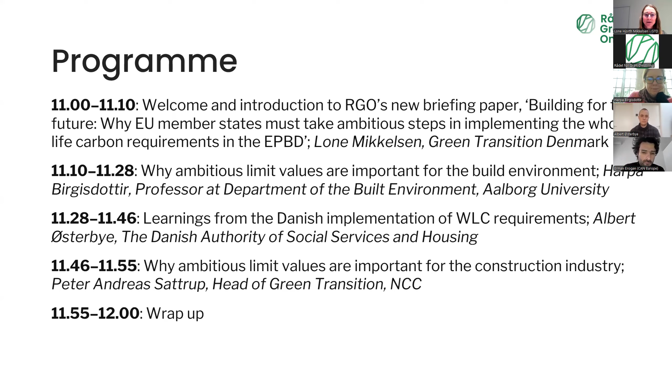As most probably know, the building sector in the EU is responsible for a very high amount of EU's total CO2 emissions, around 36%. Today we started talking about this whole life carbon expression, where early on we talked about the operational carbon, which is used when the building is in use. But since we expect these carbon emissions to decrease through efficiency improvements, the embedded carbon becomes more and more important to also include in the calculations for carbon emissions.

So now this whole life carbon has been introduced, and several member states have already introduced regulations nationally. From May last year, it was also incorporated in the revised EPBD in the EU. But it's very important to note that only the full potential will be realized through ambitious national implementation in the EU member states.

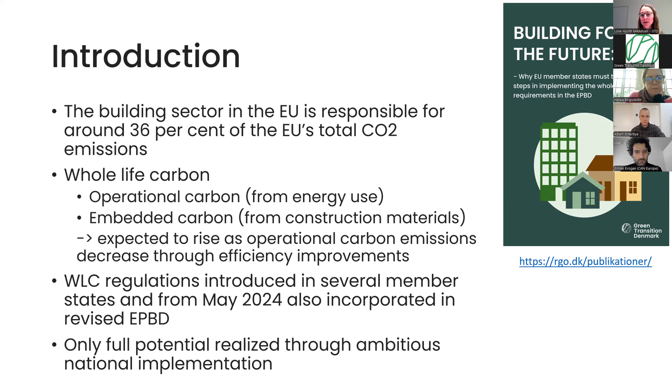In Denmark, and I'm sure this will be put in more words by both Harpa and Albert, in May 2020, Denmark introduced a test phase for a voluntary sustainability class. This came after a lot of calculations and data collection had been done, maybe especially at Aalborg University with Harpa involved in this work. So a lot of knowledge was already ready. In this phase, developers tested the sustainability requirements on specific new constructions, renovations, and transformations.

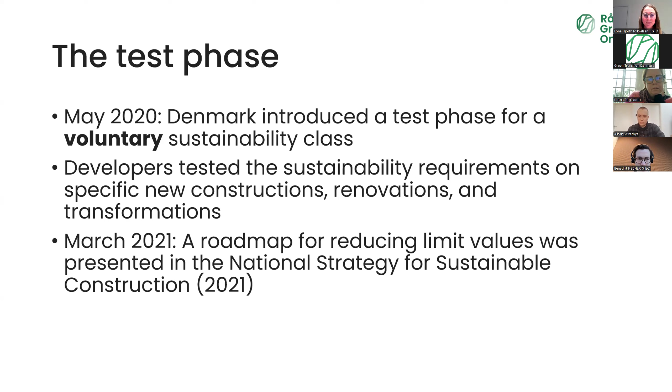When this roadmap was presented, it was also agreed politically that every second year these numbers should be revised, or the strategy should be reviewed.

Already in 2024 there was a revision, and at the same time there was a mobilization in the construction industry, because they found the limit values too unambitious. One argument was that an average new building in Denmark emits 9.5 kilograms CO2 per square meter per year, while the current limit value introduced was 12 kilograms CO2 per square meter per year.

As seen in the previous slide, for 2025 the next limit value was 10.5 kilograms, actually higher than the average new building in Denmark. So more than 630 stakeholders from the Danish building and construction sector signed up for more ambitious limit values, backing a call to lower the limit values to 5.8 kilograms CO2 per square meter per year in 2025. This number was taken from the reduction roadmap 2.0, which pointed to the Paris Agreement.

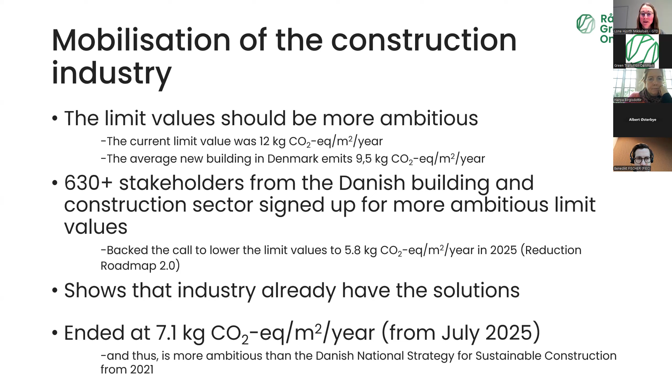This mobilization really shows that the industry already has so many of the solutions. In the end, there was agreement on a limit value of 7.1 kilograms CO2 per square meter per year, which will be incorporated in July 2025. This is more ambitious than the national strategy for sustainable construction from 2021.

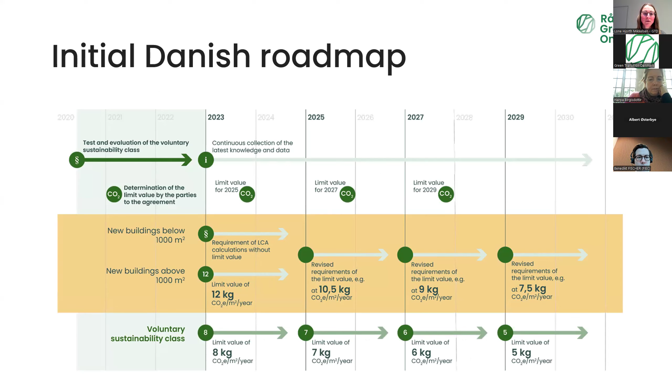And it's actually also very close - if you see the lower line, it's very close to the limit value of 7 kilograms CO2 for the voluntary sustainability class.

So we have some overall recommendations for an ambitious implementation in member states. Data is a crucial factor, and I'm sure Harpa will put more words to this.

It's important to initiate the uptake of the national roadmap immediately and not wait for the deadlines. Several member states have shown this is actually possible. Also, it's a good idea to include a voluntary sustainability class, which can introduce a carrot for developers to choose more ambitious paths.

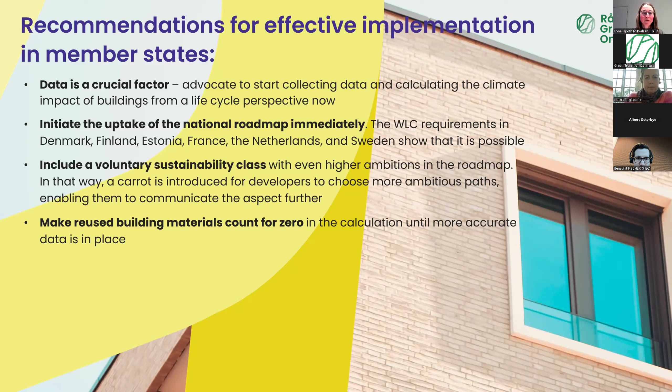And also, it's important to make reused building materials and recycled building materials count for zero in the calculations, so it is also preferable to use these materials.

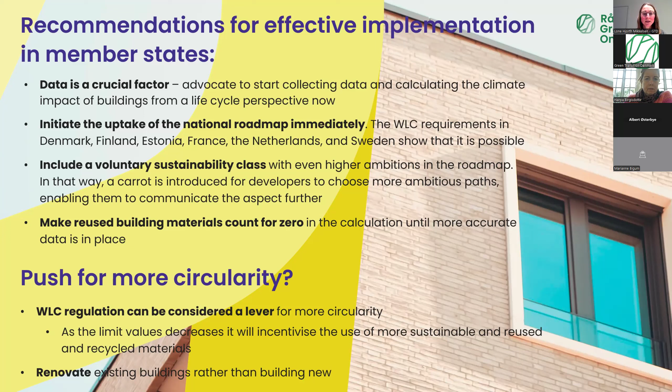And also the whole life carbon regulation can be considered a lever for more circularity, as when these limit values decrease over years, it will incentivise the use of more sustainable and reused and recycled materials. And then also overall, we should renovate existing buildings rather than building new ones.

So with this short introduction, I will give the word to Harpa Birgisdottir, who will tell us why ambitious limit values are important for the built environment. Harpa, please go ahead.

We all know that we have an urgent environmental challenge, and that regards climate. It regards more broadly our total environment. We know about the urgent climate challenge, and this has been told to us for many, many years in report after report from the IPCC, giving us ideas about the different scenarios we are looking into regarding the climate challenge.

And all this is, of course, about having to limit our release of greenhouse gas emissions, and we see different scenarios for our future depending on how well we do this. I know we all know this, but I just want to set the scene.

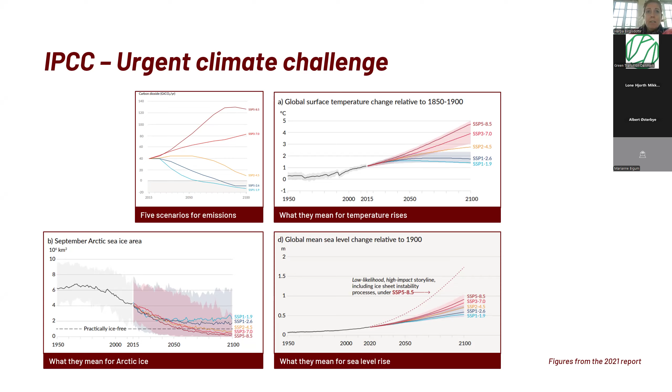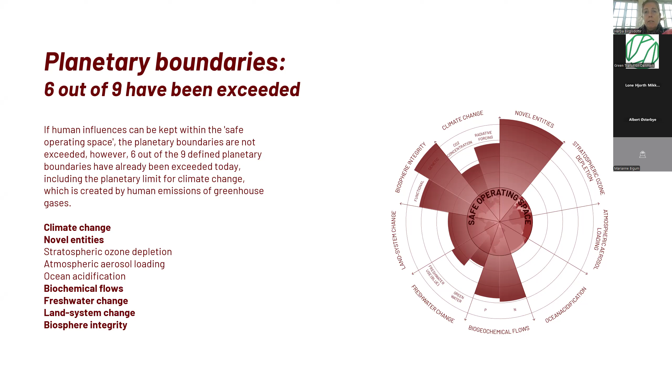We also have more than only greenhouse gas emissions to look into. Here we often work with the planetary boundaries and look at that. We have to keep our emissions and our impacts on planet Earth within a safe operating space. The situation now is that 6 out of 9 boundaries are exceeded, and many of them are very much far exceeded.

In terms of resources, there are different ways of looking into this, but one is the measurement of Earth Overshoot Day. That tells us a little bit about how our use of resources is exceeding our annual share if we wanted to have a sustainable use of resources. In Denmark, the Earth Overshoot Day was last year on March 16th, 12 days earlier than the year before.

So there is no doubt about the urgency, and therefore why we need to look into ambitious limit values when it comes to buildings. Now I'm going to talk a little bit about what we have been doing in Denmark. In Denmark, we are among one of the few countries that already now has limit values on the greenhouse gas emissions from new construction.

And as was told earlier, there was a push for much more ambitious levels. But as I will also show you a little bit later, although we believe and see that we have set some legislation that is challenging to work with, it is still not enough in order to meet, for example, the Paris Agreement.

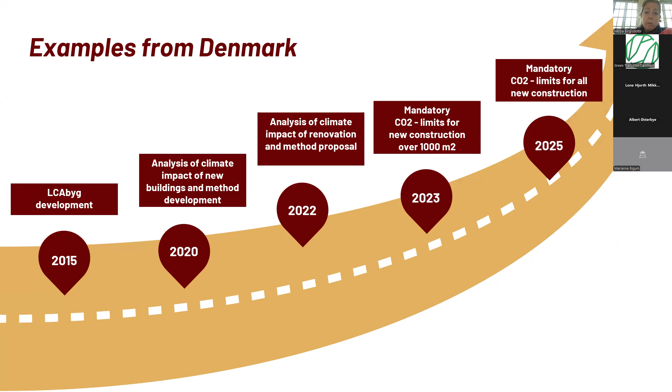We have been focusing a lot on gathering knowledge on the climate impacts of buildings. This started earlier, but we have this report from 2020, also translated to English in 2021, where we made this study of whole life carbon assessment of 60 new constructions at this time.

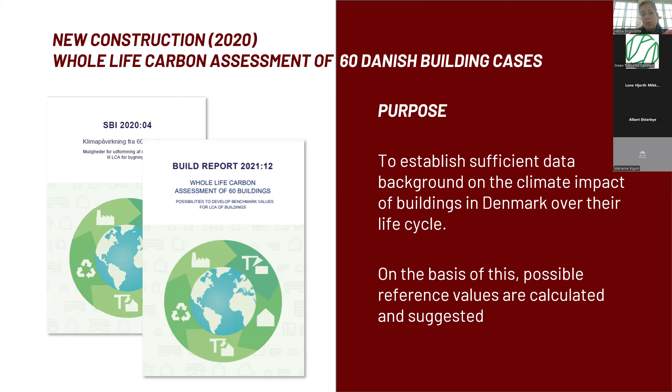The purpose of this study was to establish sufficient data background on climate impact of buildings in Denmark over the life cycle, with the purpose of being possible to develop reference values or limit values later on, because the limit values then came with the strategy that Lone just described earlier.

Just to very quickly recap, I'm sure most of you are familiar that we have the life cycle of buildings, divided into phases and modules. In our starting point in Denmark, we have simplified a bit, so we don't cover all modules according to the standard EN 15978, but we are increasingly including more phases and modules.

So here, starting in the study that we worked on with the 60 cases, we have a simplified scope of the modules included, but covering the whole life cycle. And we are calculating for a 50 year reference study period for the buildings.

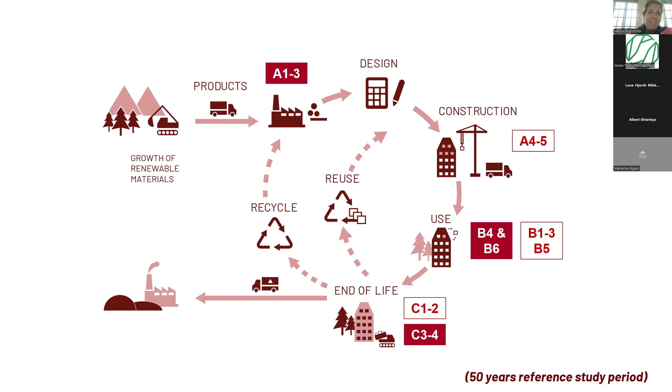So if we look at the 60 cases we calculated some years ago, these are different kinds of buildings, and in the report you will see all the details. When you calculate this for 50 years and sum it up into kilograms CO2 per square meter per year, we can see that the results of those cases ranged from a little bit above 6 kilograms CO2 per square meter per year up to about 14.

What we also saw here was that with the data and assumptions we have in Denmark, around 25% of the emissions over the 50 years were coming from operational energy in the buildings, and 75% from embodied carbon. That is due to the transition to more use of renewable energy in our energy grid in Denmark.

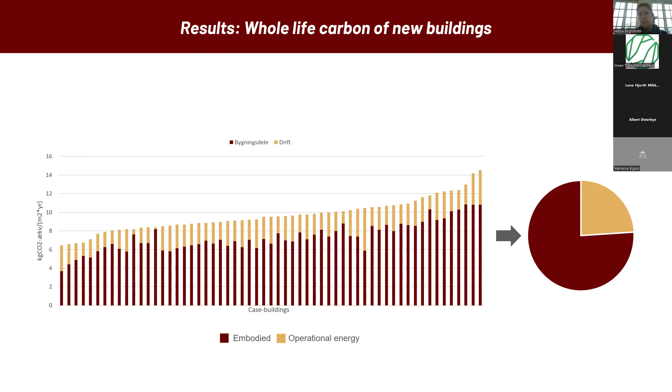And from that, I'm sure Albert will tell more about that, from the National Strategy for Sustainable Construction, a limit value was set of 12 kilograms CO2 per square meter per year, and the voluntary one of 8, which was also mentioned earlier.

But here it was based on the fact that around 10% of the cases we calculated could not fulfill the limit value. Of course, at that time there was not much knowledge about how to do LCA for buildings and so on. So we have to know that we have an urgency and we need to decrease, but we also need to make sure that the building sector now knows how to work with this.

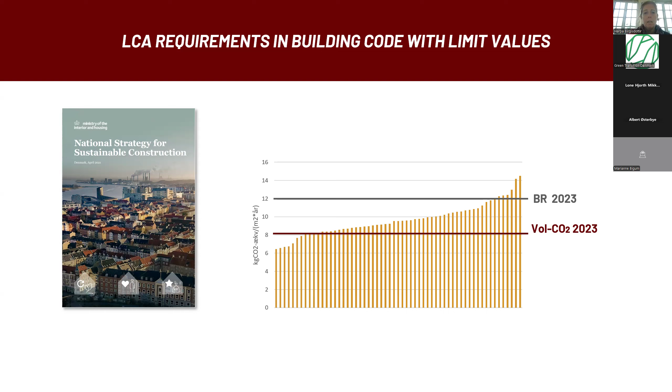In our research institute, we have made a lot of different studies on the possibilities to reduce the climate impacts of buildings. I'm not going to mention many, but I'll mention one study we had, which was the housing construction from 4 to 1 planet.

That was trying to reduce our emissions from using resources, like going from 4 planet Earths available to 1, simplifying a bit, like going from around 10 kilograms CO2 per square meter a year to 2.5. Is that possible? At that time we thought, okay, that is far from what we can do.

But again, just quickly to the results. In this report, available in English, the gray ones are the conventional cases, and the green-blue ones are the 24 cases we looked into in this study. Here we could see examples of residential buildings built in Denmark with much lower climate impacts.

The median of our standard cases is around 10.8, while the median value of the best practice cases was 6.2. You can see examples of some cases that are around 3 and 4 kilograms CO2 per year, clearly showing that it is possible to build differently.

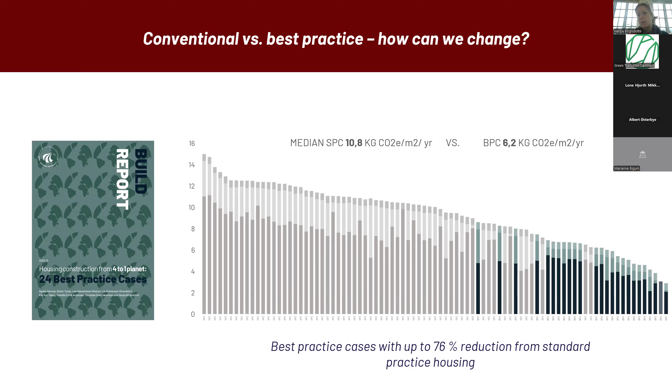As was mentioned earlier, going back to the limit values we have in Denmark, our task has been to conduct analysis and provide results that can be used to set the limit value. We did the 60 cases to prepare for the first limit value in 2023, and then we started another study to prepare for the limit value of 2025.

This report is only available in Danish, but there is an English summary in it, and we have some research papers related to this. Here we have gathered much more data than we had earlier when we started with the 60 cases, and now we have a little bit less than 300 cases available.

You can see a huge range here from the best practice of a little bit less than 3 kilograms CO2 per square meter per year. But you can also see many cases up to, in some cases, much higher emissions, higher than 12 kilograms CO2 per square meter per year.

That is because we also had tasks to study buildings with specific requirements that really need more materials or more strength, like hospitals, laboratories, and so on.

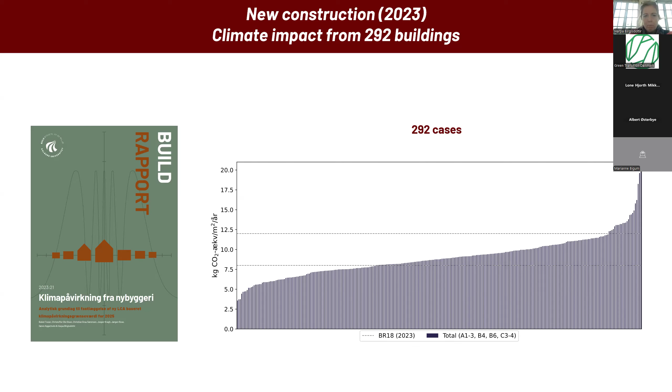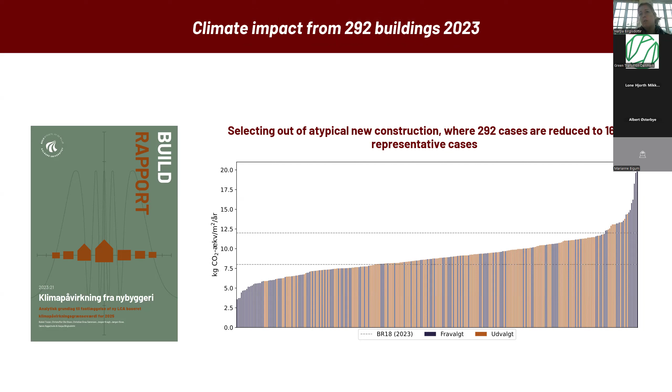So this sample of 300 cases covers both best practice, normal practice, and buildings with special needs. But our task was to select the typical new construction in Denmark, and that is why we are sorting out from our cases — the orange ones are the ones we have chosen as representative for climate impacts in Denmark.

Here we have the results, like I showed you earlier, now from 60 to 163 cases, but still a range from 6 to around 14 kilograms CO2 per square meter per year. So the range is the same, although we have many new cases and new data.

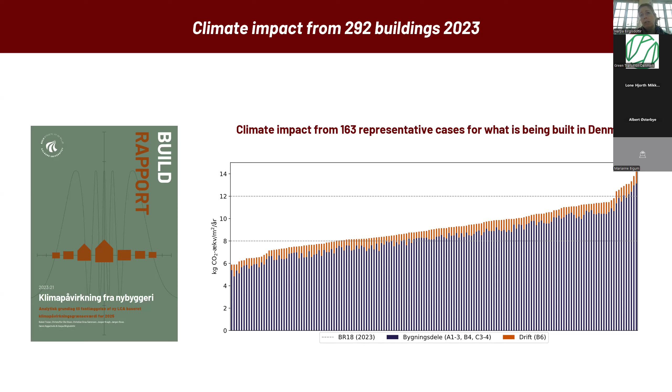I'm sure you can see that now around 90% of our emissions for the 50-year reference study period come from embodied carbon, and only around 10% from operational energy. Here we have new data and new political agreements taken into account in our calculations.

Since we also have more cases, we can divide this into different building types, starting with single family homes, multifamily homes, row houses, and then offices and so on. So we also have better data knowledge of at least the first four building types.

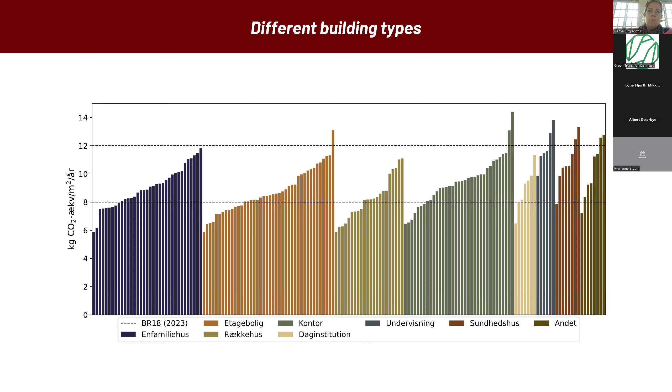Then what happened was the political discussions, and the pressure from the reduction roadmap, and the limit values that we got were, on average, going from 12 to 7.1.

But you can see also here how they have been divided into different building types, with single family houses having a limit value of 6.7, for example, and multi-dwellings of 7.5.

And you can see the lines showing where the limit values are set compared to what we have of cases. So at least here, the limit values that we will have from 2025 will be quite challenging for the building sector compared to how they have been used to build.

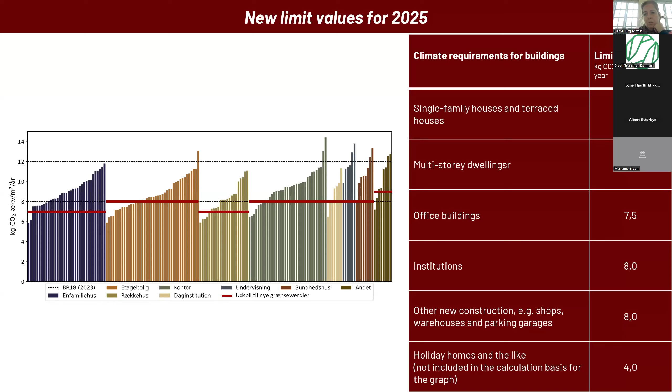Back to the question, why ambitious limit values are important for the built environment — you remember what was mentioned before, so there's no question about that. What's quite important for us to start looking into is how far our limit values in the building code are from the CO2 budget we would have for the Paris Agreement.

We have committed ourselves to absolute targets — we are going to be net zero or climate neutral in not-too-distant future. We have committed ourselves to the Paris Agreement, and that is why we also made studies looking into what is needed to work if we have the Paris Agreement to fulfill.

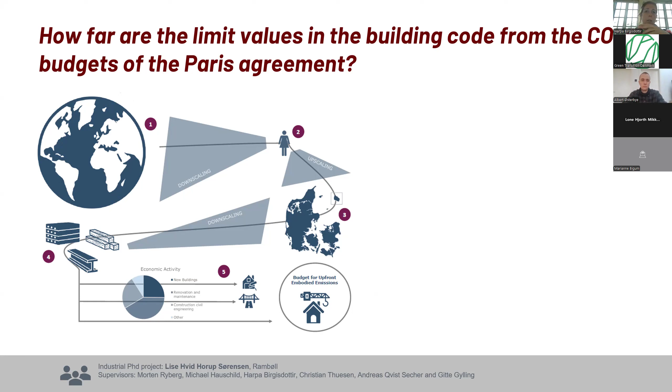There we have only a limited budget to work with. This is a study comparing where we should be on the roadmap if we want to fulfill the Paris Agreement, the green and blue ones. The red one is where the political agreements made in year 2021 stand, and we can calculate that the limit values set in 2021, 12 and 10.5 and so on, were exceeding the Paris Agreement.

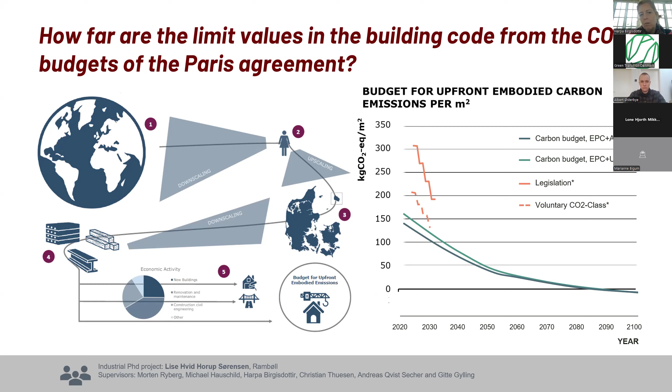With 220%. But of course now we are getting a bit closer. Other studies also show us very large variation between the conventional practice and the best practice that I have been introducing.

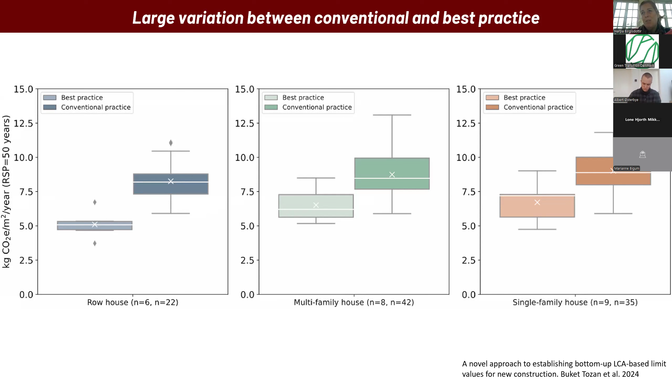This is again based on the cases I've been showing you, with links to journal papers where this has been analyzed. You can see for row houses, multifamily houses, and single family houses, there is quite a large difference between the best practice and the conventional practice.

And just lastly, we have also tried to use all these calculations to calculate the whole life carbon from a large share of new construction in Denmark.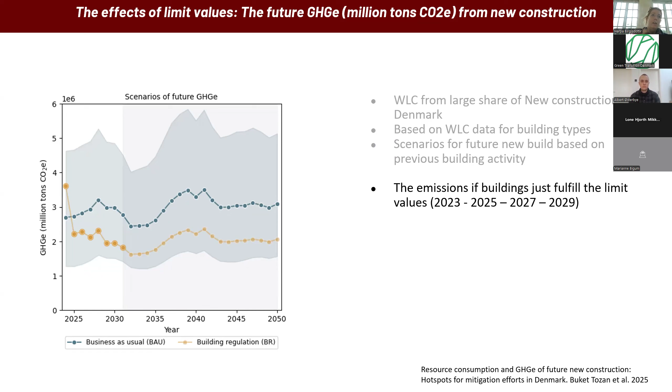We have a large variation because it depends on whether it's built according to the highest or lowest level of emissions. But when we see the effects of putting in limit values - and now we have limit values set for 2023, 25, 27, and 29, though we don't know how ambitious it will be in the future - we can see a huge impact in lowering the emissions from construction by having those limit values.

The last one shows the scenarios of how the emissions of buildings are expected to be after having limit values. But what's quite important for us to know is that we are still not getting the construction industry there - more needs to be done to get down to a climate neutral building sector.

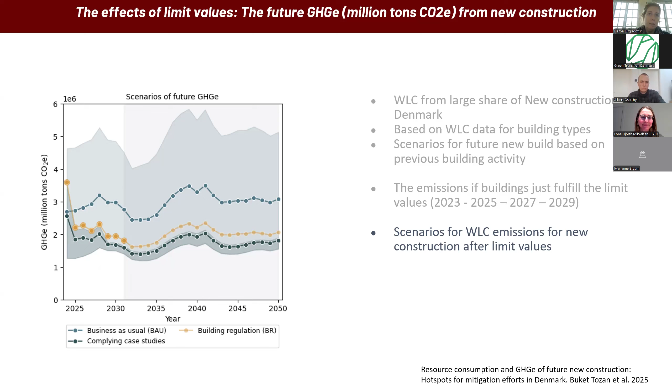Just lastly, we've been talking a lot about limit values, usually expressed in kilogram CO2 per square meter building per year. We also need to talk about our consumption of space, the use of square meters. In Denmark, for example, the average detached house has grown from 122 to 213 square meters - a huge increase in our consumption of space. So ambitious limit values are very important, crucial, but they can't solve this alone.

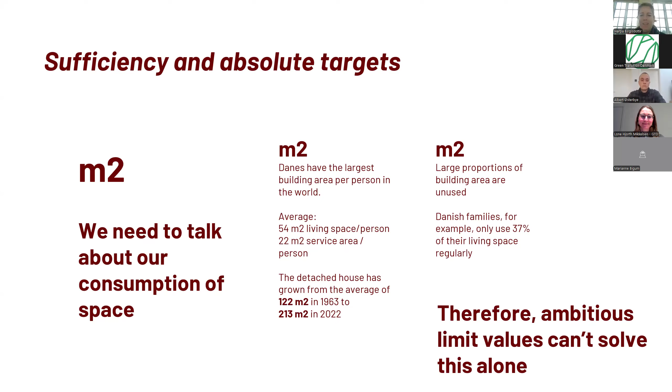Thank you very much, Harpa. It was very interesting, and it really did put words on what I just shortly mentioned in the first presentation.

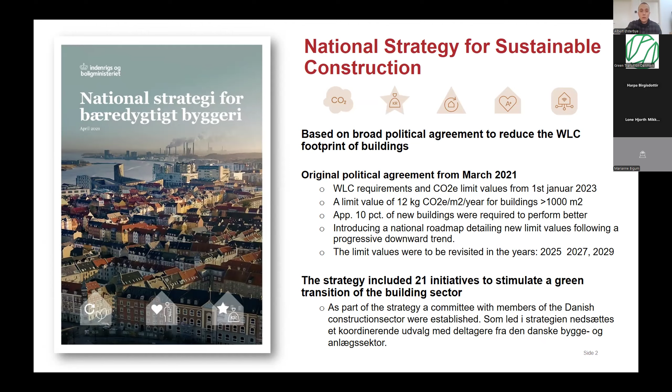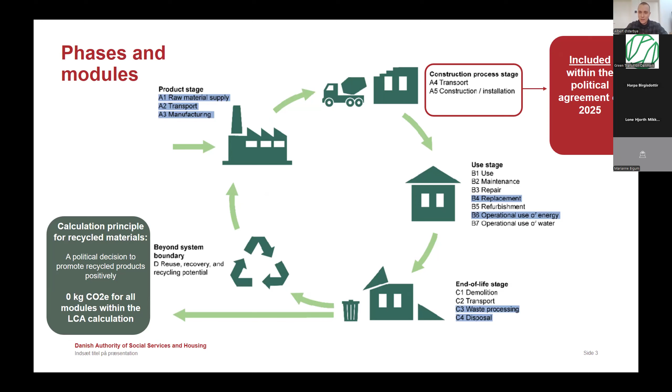I would have elaborated a bit more on what phases and modules are included in the Danish whole life carbon requirements, but as Harpa just presented these, I will rush further, just mentioning that we also had a smaller additional political agreement from 2023 that promoted recycled products, saying that these should only be counted as 0 kilo CO2 throughout the whole life carbon, so that we will have more recycled products in construction, because right now it's very limited - maybe a couple percent.

So the new agreement's intention was to speed up the green transition of the construction sector by introducing additional measures to limit the construction's whole life carbon footprint. Firstly, the new agreement tightens the CO2 emissions limit value from July 2025.

The political agreement, as Harpa also mentioned, is based on the percentage of buildings that need to perform better, meaning a change of construction practices. This is based on the study made by Harpa and her colleagues of around 300 representative cases, including whole life carbon calculations.

In the original agreement, it was proposed that the revised limit for 2025 should be set at a level where every third building needed to perform better compared to the 2021 baseline. But with the new agreement, more than 4 out of 5 buildings need to perform better. So it's actually a quite significant and quite ambitious limit value compared to the original agreement.

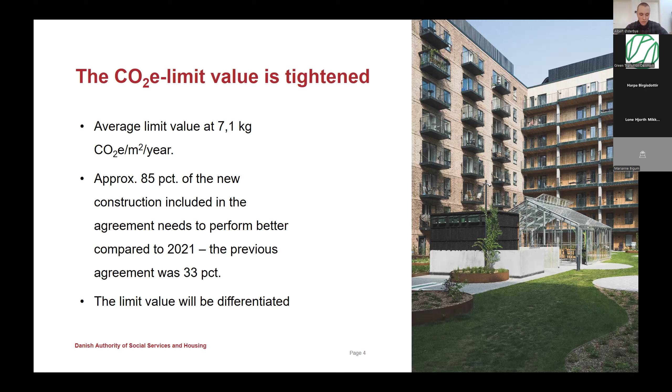In the scheme you'll find the new limit values for the new roadmap. As an example, holiday homes under 150 square meters have a very small and low limit value, since these are normally only used in the summer period and therefore don't have as much insulation. So it's easier for them to meet a lower limit value compared to apartment buildings, which have more stories and therefore need more materials.

In the new agreement, we also covered much more of the entire building stock under the new whole life carbon requirements. First, the former limit of 1,000 square meters was removed, and furthermore new types of buildings, such as holiday homes, unheated storage facilities, parking structures, and larger extensions of buildings were also subject to the new whole life carbon requirements.

The expansion to new types of buildings aims to ensure that private households and public housing didn't bear too much of the financial burden of the green transition within construction and the building stock in total, so that the cost of reducing CO2 emissions is spread out more evenly compared to the former political agreements.

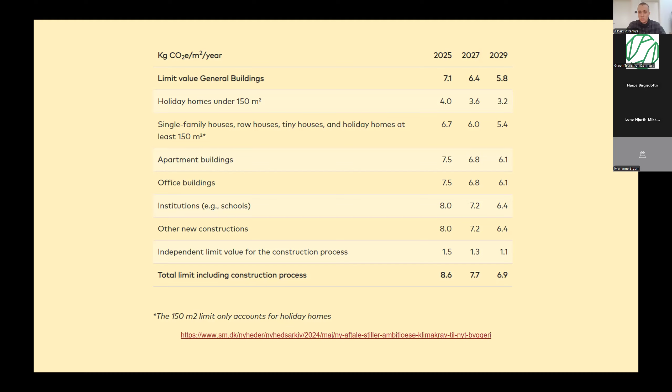As a new thing in the new political agreement, we also include the construction process. It has got an independent limit value of 1.5 kilo CO2 per square meter per year in 2025, and that will also be tightened in the next couple of years.

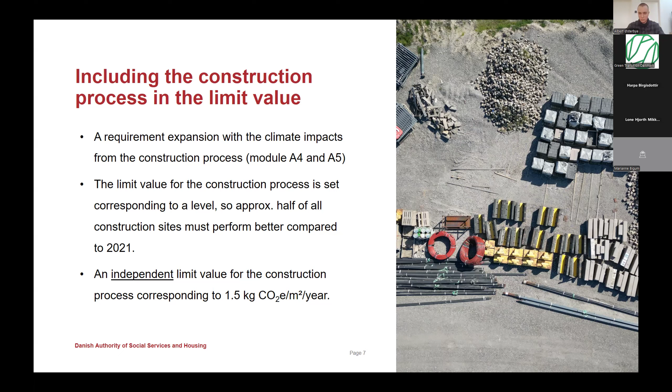The level was set so that approximately 50% of construction processes needed to perform better compared to the 2021 level. Since we have an independent limit value for the construction process, the reductions actually have to come from the construction process itself, and you can't borrow a reduction from other phases to meet the overall limit value.

So the whole political rationale of the new political agreement is to change the way that we build. There will most likely be some changes in construction practices caused by the new limit values. We have categorized the new ways of construction into four groups.

We have some buildings which are under the limit value, and therefore they don't have to change anything. Then we have some small optimizations, between a reduction of 0 to 2 kilo CO2 per year. We have some partly changes, between 2 and 4 kilo CO2 per year. And then we have some that need to totally change the way they build, which is above 4 kilo CO2 per year.

In the figure to the right, and I'm sorry the legend is in Danish, you will see how many buildings are expected to change the way they build. If you look at the last two colors, approximately 45% of new buildings will need to either partly change their practices or totally change. This is a quite significant task for the entire construction industry to fulfill.

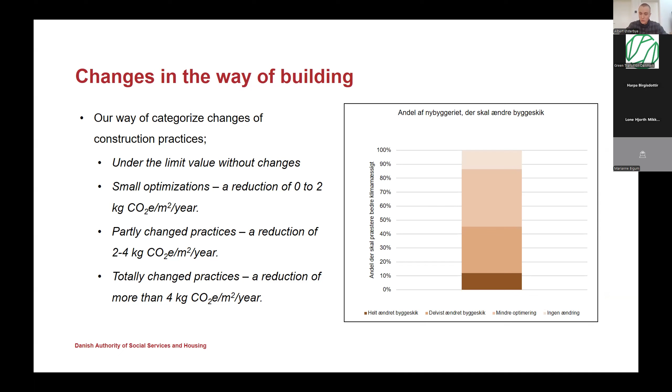And therefore, we also need some new competences and some new best practice cases. But also, we need to revise the existing building regulation in order to handle both the existing technical requirements, such as safety and health, but also the green transition of the building stock, which leads me to the next slide.

The revision of the building regulation has four themes in it. The first one is to make sure that we have the right balance between the technical requirements, such as safety and health, and energy consumption, making sure that these requirements go hand in hand with the new limit values, so that it's possible to meet, let's say, the technical requirements of fire safety as well as the new limit value.

As part of the new revision, we also adjust the energy requirements of conversion of existing buildings to ease renovation and to make sure that we renovate more rather than just demolish and build new. I can see that I'm a little rushed, so the next themes, number 3 and 4, are also very crucial, but maybe not as important when talking about whole life carbon.

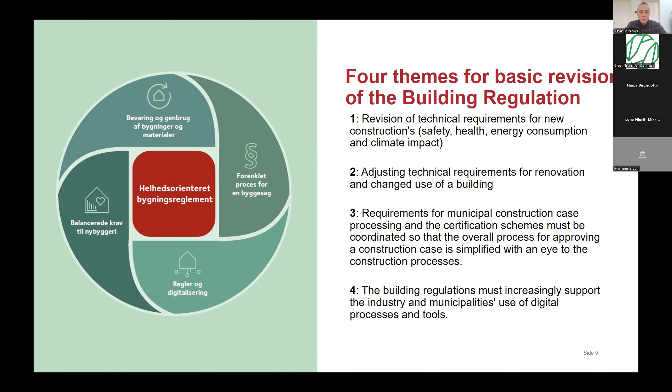So this is how we have implemented it in Denmark. I will just briefly run through what I think all the member states could learn from this. First of all, you should be aware to clarify some special aspects of the LCA standard. Of course, the LCA standard is very fine and very useful for us to use, but it is not specifically targeting...

...the whole life carbon requirements specifications in a national context. As a result, many different national whole life carbon requirements could be formulated while using the same standard, and therefore there are some aspects that you should be aware of.

First of all, you should consider what stages and modules you should implement. The Delegated Act coming as part of the new EPBD Article 7 would probably, to some extent at least, elaborate on what modules and stages should be used. But you should also be aware of what data you have available and also your experiences.

A whole life carbon calculation for the entire life cycle is a quite comprehensive task, and therefore we have also made some simplifications of certain modules. As an example, transport, according to the standard, should also account for the loss of materials from the production site to the construction site, which is quite difficult to implement, and we don't have the necessary data, so we don't have that with us.

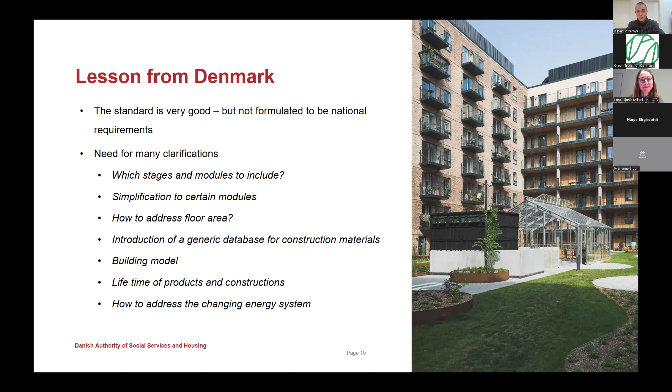I have one last slide, Lone. I will do it very quick. Yeah.

I think the most crucial thing on this slide is to be aware of how you should handle mixed-use buildings. In Denmark, we have, as I said, differentiated the limit value, but you have some buildings which are, let's say, 50% apartments, 50% stores.

And in this instance, we have agreed in Denmark to have an overall average limit value for these buildings, saying that 50% of the building represents a building type of 10 kilos CO2, another 50% of the building represents a building type with 7 kilos CO2, then an average, of course, should be 8.5.

Last but not least, I will recommend all my colleagues to have a very close relationship with the industry, since it ensures that we share crucial knowledge. We have the opportunity to test new ideas, and it also makes sure that we can embed the relevant initiatives within the professional environments.

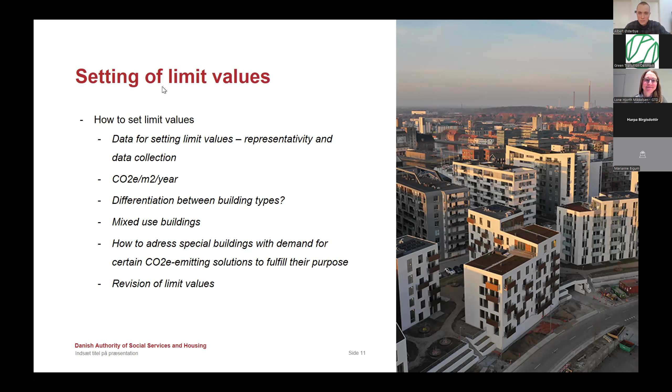So that was it for me. I'm sorry I went a little bit over time.

My name is Peter, and I'm head of green transition at NCC Denmark, which is a very large construction company in the Nordic region. We constitute currently approximately 22% of the overall business, which is focused on the Nordic countries, and we have our headquarters in Stockholm.

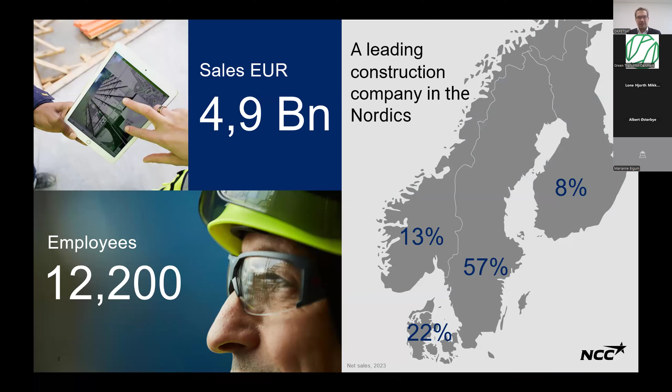So a rather big company. We not only build buildings, we also do property development. We produce gravel, stone materials, asphalt, and we also do infrastructure projects. So it's a big construction company with 4 different business areas.

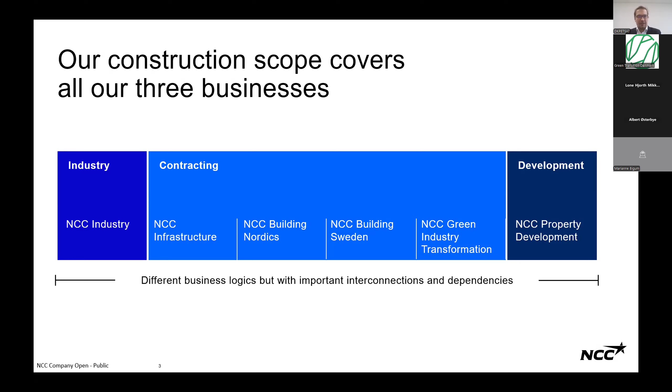What we are very interested in is complex projects. The more complex, the better for us. And of course, when we talk about sustainability, that is another layer of complexity that we have to manage and help our clients execute on successfully.

We work with this sustainability framework. My role is in the top 3 blocks of climate and energy, natural resources, biodiversity, materials, and circularity. But what is really the core of it is that as a business, we want to be data-driven. We want to provide expertise that will help us guide the construction process for our clients.

So knowledge is really crucial, and this is also why we are very keen to use whole life carbon assessment methods, in order to be very precise about what works, what is the effect of the solutions that we provide, and how can we find cost-efficient solutions for our clients. Data-driven is super important, knowledge is super important, and that is really what we're interested in.

We have this overall business ambition to be climate neutral by 2045, a little bit ahead of time according to the EU targets. But in the short term, we want to reduce our climate footprint by roughly 50% before 2030, and that is really our short-term goal.

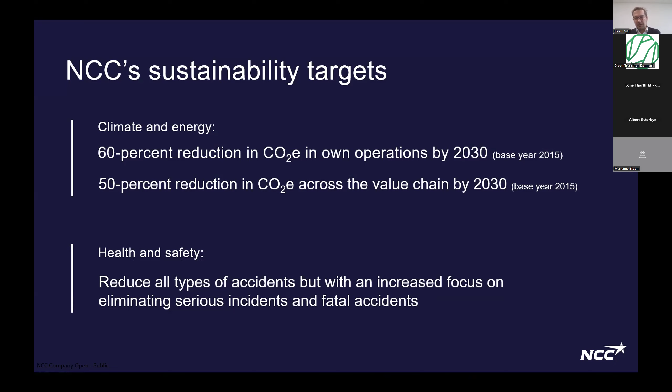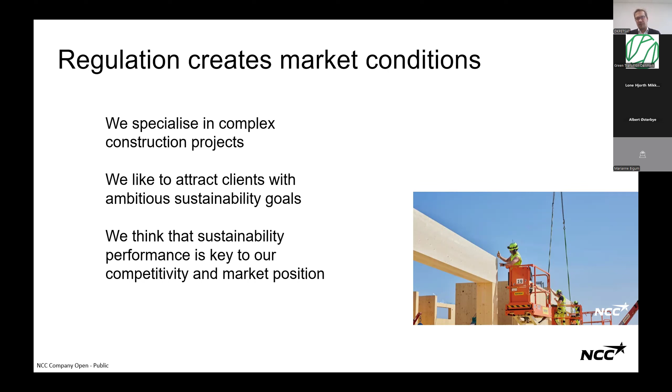So we really see sustainability and whole life carbon assessments as a core service that we provide to our clients. And we think it's super important that we have this climate regulation in the Danish building code, because without it, it would be much more difficult to actually achieve our company goals. Having the regulation in place is really having a huge transformative effect on the entire construction industry.

That's also why we have actively supported that we, in the first place, got not only the requirement to do the calculations, but that we actually have binding targets in the building code introduced by 2023. It makes a huge difference that we implemented the targets already, because that means the construction industry really knows this is not just a communication or calculation exercise, not just a data reporting exercise. This is really something that we need to navigate through in our project development processes.

The first goals were relatively easy to achieve with traditional construction. So we were actually requesting that these targets be made more ambitious, because we felt that we could actually do much more if the requirements became a bit tougher than they were in the first place. And we joined basically all businesses, big and small, in this request for tightening the climate targets by 2025.

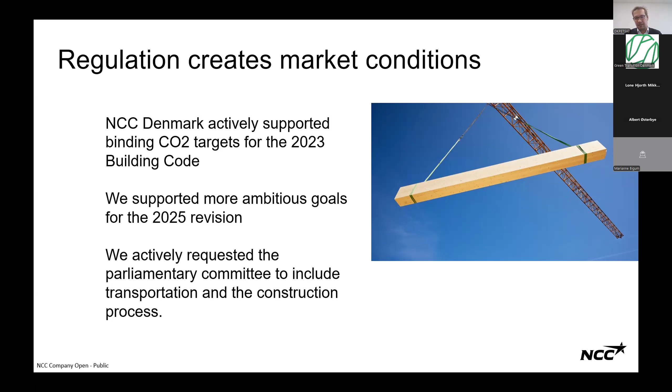So we really lobbied quite hard, very directly with the parliamentary committee, that we should include the construction process in it. Ordinary construction processes where you don't do any optimization - that is in a similar range to 30, 40, 50 years of building operation in the Danish context. We do have some of the most demanding energy use requirements, so it might look different in other countries, but it is really significant and has been overlooked until now.

What we could see, and we knew this from beforehand from the energy targets implemented 10 years ago, is that once we have these requirements, it becomes a transformative driver for change in the entire industry. Having these long-term targets, knowing there will be a reduction in carbon footprint required by the building code not just for next year but for the next 10 years, or in the Danish context 7 years, means it becomes much easier to direct the necessary investments in competence building.

Knowledge building, product development, and so on, because we have a long-term perspective. So that's really important. And having the targets also creates a market for competitive solutions once you can find the cost-efficient solutions, which is really what we think is our task.

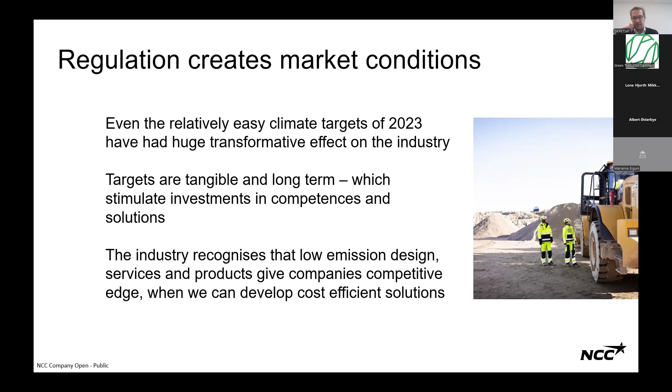So in our company, we are in full swing implementing whole life carbon methodologies. We are informing all our business processes by whole life carbon assessments. And we are also in the process of changing our organization so that the knowledge that used to be specialist knowledge in my team is actually getting spread out into all the production teams that we have within the company.

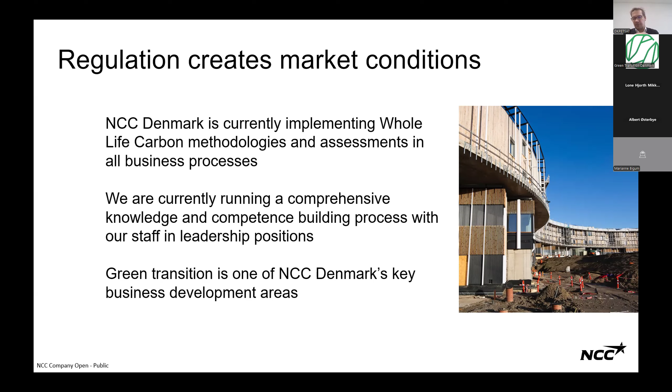And that is because we think that this is really a business opportunity, and we really look into harvesting the benefits of finding these low emission solutions. So to us, this is really a question of creating a market through these demands, and we think it's really one of the beautiful ways that regulation can create a market which enables competition. If you're awake as a business, you would really just lean into this as a value proposition to your clients.

So in that sense, I think that it has been a very good cooperation between industries which have requested these regulations to enable a market to actually grow. And I think that the conversation between businesses and the government and research institutions has been very fruitful, and we see that this is really enabling change. So that's really my perspective on it.

Thank you so much, Peter and Andreas. Interesting also to hear it from the businesses - that was an important view as well.

For all of you, I hope we can have one last question: if you have a very specific recommendation for member states that have not yet started, what is the most important thing? Is it the collaboration between different stakeholders and institutions that you mentioned?